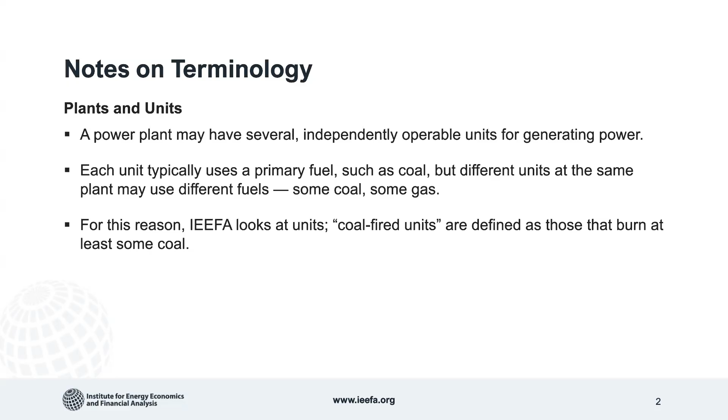I also want to talk a little bit about the way we use the terms retirements, closures, conversions, and what we mean when we talk about the end of coal use. Retired is kind of an official terminology used in the industry when a unit has stopped generating power, but also usually has been officially deactivated from the grid, or it has really long-term unavailability to the grid. And sometimes, but pretty rarely, that includes units that have been, quote unquote, mothballed, or in cold shutdown. That means that those units cannot be easily restarted by the owner.

They can't necessarily just jump back on and produce power without going through a considerable process, both with the grid operator and the owner of the plant, in order to make it viable to produce power again. This is very different than operating units that are sometimes in short-term outages, which could be as much as a year sometimes, in the case of problems at the unit. But we look at operating units and include them as operating whether or not they're in short-term outages.

Now, when it comes to the end of coal use and conversions, we only consider units that are being converted to 100% gas as having permanently ended coal use. There are some units in the country that use a mix of coal and gas. We still consider them as operating with coal. They're not using as much coal, but they're still operating using some coal. We also, upon occasion, are aware that units that are being converted to gas stop burning coal and start the conversion process. Even if they're not finished with that conversion process, they've actually stopped using coal. And there are a number of units in the country that are currently in that status.

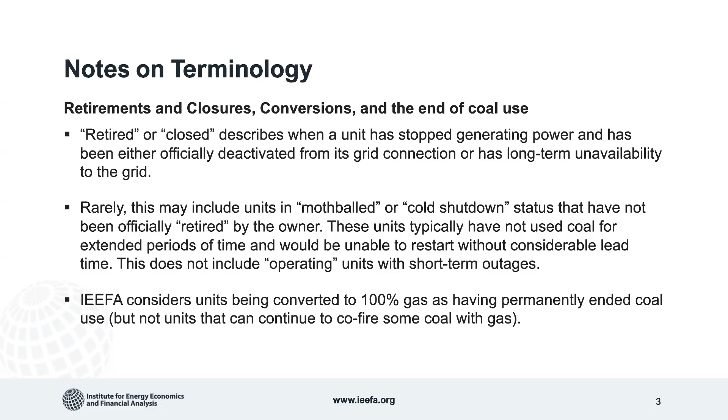So next slide, please. We'll start our first of the three sections by taking a look at the past. And there's been some discussion that coal units that were recently closed could be restarted and will lead to a revival in coal use. We don't think that's the case, and we're going to go through why that's the case now. Next slide, please.

So we did an analysis of the 102 coal-fired units that were 50 megawatts or more. That's usually a threshold. It's kind of a convenient threshold that marks the difference between sort of local, very small academic or municipal power plants. There's quite a few of those, but they really don't add up to much capacity. The ones that are larger than 50 megawatts are really the ones that provide all the power in the country.

So we looked at the 102 units that were closed between the beginning of 2021 and the beginning of this year. They had a total capacity of a little over 36.5 gigawatts. And we looked at those partly because they really seemed like they would have the most viability for restart, since they're the most recently closed. You get older than that and they haven't been used, you really start to have problems with the turbines and with all the equipment in getting them restarted. And we'll talk a little bit more about the costs involved in potentially restarting any of those units.

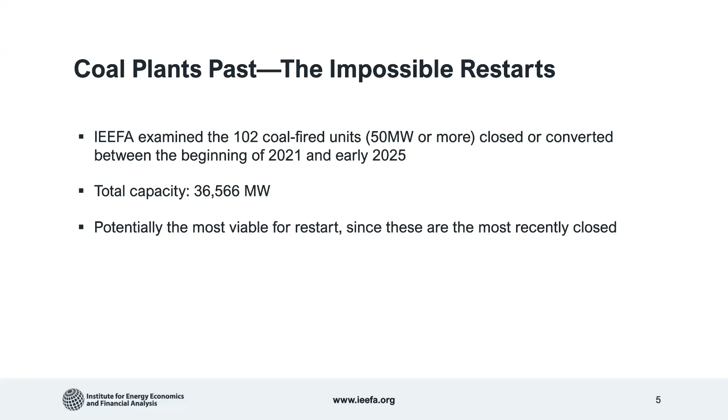But first, next slide, please. We're going to go through why it's pretty impossible to restart most, if not all, of these units. So this is a look at the 102 units by the year that they closed, and the size of these gray circles represents their capacity when they were closed. So they range in size from a little over 50 megawatts all the way up to the largest one, which was around 1,300 megawatts. There was one unit like that. Next slide, please.

So we then took a look at, well, which of these units has already been converted to a different fuel? And there were 14 units like that. Most of them, with one exception, were converted to gas. The one exception is a unit that is in a reliability must-run condition in Maryland, and it actually runs on fuel oil, but that's a little misleading because it's probably not going to be run very much at all. But that takes out 14 of these 102 units.

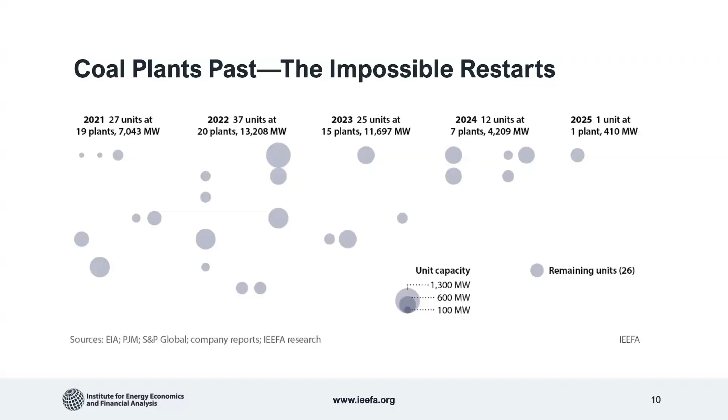And I want to point out that some of the newest ones that were closed, like the one in 2025, which is the Indian River, they wanted to close that plant a number of years ago, but it was also in a reliability must-run situation. And the company that owns it really doesn't have any interest in restarting it because it wasn't economic to run in the first place. Next slide, please.

So in summary, this is really a list. Looking at these 102 units really made us realize just how impossible it is to go back and restart units that have already been closed. Not least because these closures are nearly all part of long-term plans by states, by utilities, extensively negotiating what their power generation portfolio is going to be that they work out with state regulators and state regulators approve. They have made tremendous investments into the billions and billions of dollars for replacement resources.

So it's unlikely that you would be restarting a coal plant if you have a brand new and far more efficient gas plant next door that you've already sunk a tremendous amount of money in, and you would not run it instead of your coal plant. That's not likely to happen. There are plenty of examples around the country like this.

Beyond that, closures, as I already mentioned, were almost always uneconomic. We believe that in every case, utilities chose units that were the poorest, or certainly among the poorest performing of their generation assets. And they were already little used in the years before they were closed.

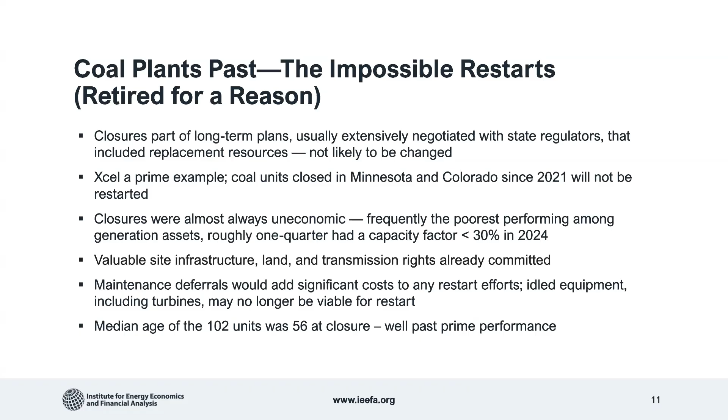So we then get into another issue with these older plants. If they were going to be restarted, somebody has to pay for them. There was the case of the Pleasants plant in West Virginia that was going to be closed. The state tried to push a couple of FirstEnergy subsidiaries in order to buy the plant. And they said for that plant, it would cost them $3 million a month just to keep it in sort of this warm status in order to be able to be restarted. But they wouldn't use it for nearly a year. And that $3 million a month would have had to be paid for by somebody.

That somebody is ratepayers, and ratepayers in West Virginia were not happy about paying for a power plant that they weren't going to get any power from and having their electric bills go up just to study this. In the case of independent power producers, that would impact investors if you were to try and keep those plants around. Unlikely that investors who've already made the decision to close certain units are going to be willing to shell out a bunch of money in order to keep those units around.

And the argument has been made that, well, we'll just generate power and that's how we'll pay for keeping these units back. The units were already used very little. They were uneconomic. In other words, they couldn't sell power economically in the marketplaces that they were in. And that means that your losses from keeping the plant around while you're not able to make money from selling power would be pretty significant. And that would either impact, again, ratepayers or investors. Next slide, please.

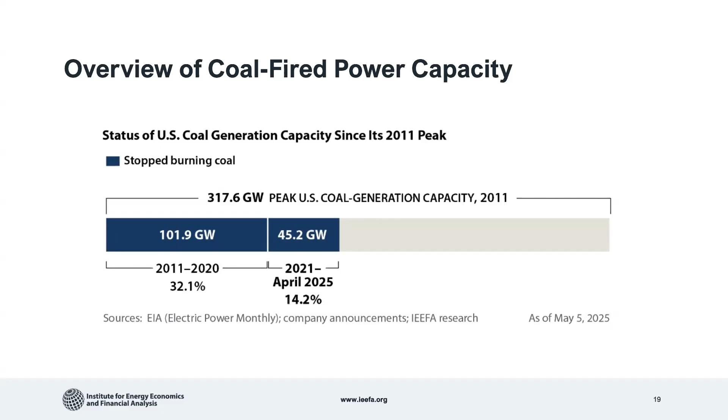Then between 2021 and now, which is really the period that we were talking about with the 102 units, we closed around another 45 gigawatts of coal-fired capacity, according to EIA. Next slide. By the end of this decade, it is expected that we'll have closed 103 more gigawatts of power, which will take us to about 2/3 of all that coal-fired power capacity being closed by 2030.

Next year, we expect to hit the halfway point of closures, right? We're getting very close to that right now. We're in the upper 40% mark. And so with the planned closures, we should be hitting the 50% closure mark of capacity in 2026. We still believe that's going to be the case. But that's not all of the closures that have been planned. Next slide, please.

There have already been announcements from the plant owners about what they're going to close between 2031 and 2040, and some of them even further out than that. And part of this is simply age. Part of it is replacement resources that need to be built. And so you're now getting up into an even higher percentage, getting close to 80% of all the coal-fired capacity has already either been closed or been planned. There's been plans set in place to close it and replacement power provided.

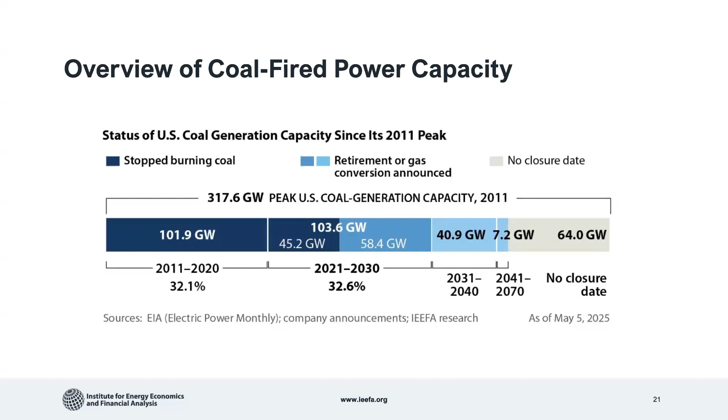I'm going to turn it over to Dennis, following that look at the past and at where we are now. And he's going to talk about the market challenges and this issue of age and how that poses problems going forward. Thank you very much, Seth. That was a fabulous introduction to where we are. And now I'm going to try to take us a little bit into the future, starting from today and then looking out a few years into what we see developing as the U.S. electricity sector transitions into the future. Next slide, please.

We're going to focus on a couple things and try to do this quickly so we do have time for Q&A at the end. But I am particularly interested in and follow closely the growth of solar and dispatchable battery storage in the United States. Those two things, coupled with continued wind and new gas, pose a huge threat, a continuing threat to coal going forward. We do not at IEEFA see that trend that Seth outlined in his charts coming to any type of plateau. We see it continuing down the path toward complete retirement.

And as he mentioned, the first key milestone should be next year when we get to that 50% mark. It is quite a phenomenal milestone, if you will, to think about having retired or replaced 160,000 megawatts of coal-fired capacity in 15 years. If you had said that in 2011, people would have looked at you funny. But next slide, please.

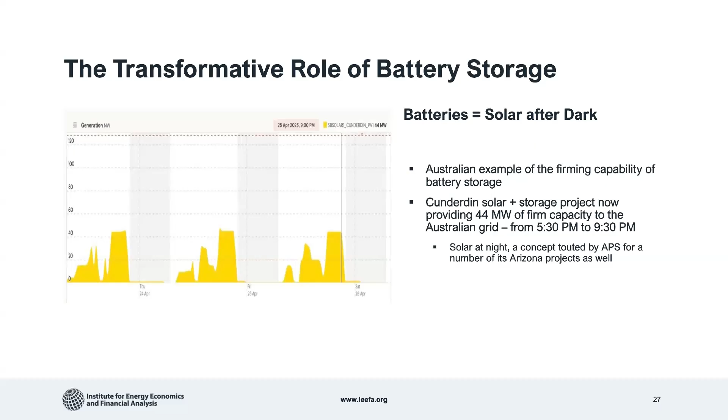But it shows very clearly that solar is and can be a dispatchable resource. And we need to think about renewables a little bit differently than you might hear from some other folks out there in the conversation. Next slide, please.

And just as a quick reminder for those who don't follow this day in and day out, capacity factor is the amount of power you produce measured over a given period of time compared to what you could produce if you produced 100% of the time. For large units like coal plants and nuclear power plants, capacity factor is a very good proxy for economic competitiveness. Obviously, if you're talking about a gas-fired peaker plant that's only supposed to run 2-3 hours every couple of days, capacity factor doesn't mean anything.

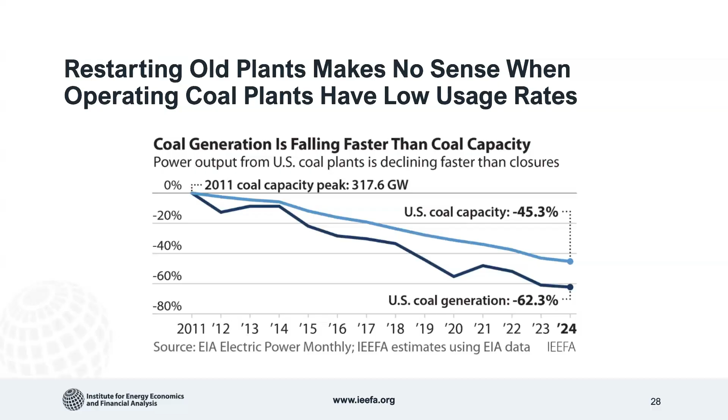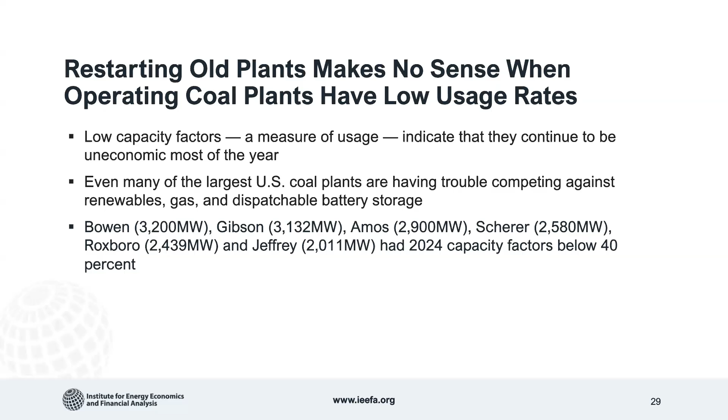Okay, this is totally off target, but I figured it would come up in the questions and answers here. And I wanted to spend 2 minutes talking about the blackout in Spain a couple weeks ago. And just to put out there the fact that in any early analysis here, we still don't know what happened. We, not just IEEFA, but the grid operators in Spain, and the journalists here in the US and elsewhere around the world. There has been a lot of early finger pointing about renewables being to blame because they don't have something called inertia. And I would caution everyone who is thinking about doing stories about this going forward that there's a lot more to it than just that.

And there are ways to plan for a grid that has less inertia than previous grids. So the lack of inertia will be a characteristic, perhaps, of grids that are high in renewables, but that does not mean it's a disqualifying characteristic. It means it's something that can be planned for. There are grid forming inverters in existence now that work quite well in actually mimicking what we call inertia from spinning machines in the fossil fuel genre.

So I don't really want to spend a lot of time on this. I will be happy to answer questions or follow up emails, but I did want to point out that the lack of inertia that is signified by retiring coal-fired power plants is not in and of itself a reason for this transition not to continue.

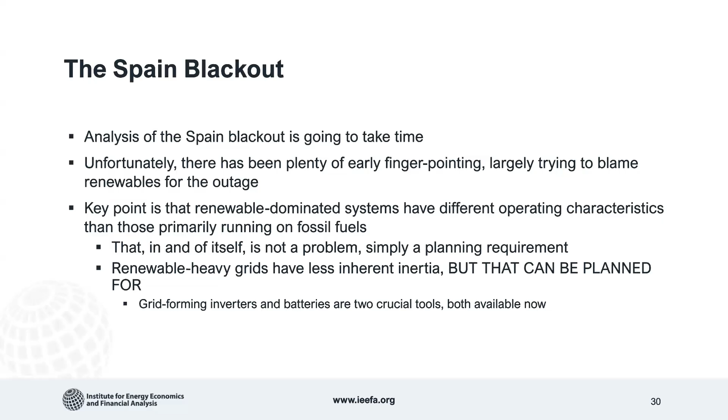We are planning for a different kind of grid right now, and it will be operated differently. That doesn't mean it won't be just as reliable and just as capable of supplying electricity when you want the lights to go on. Next slide, please.